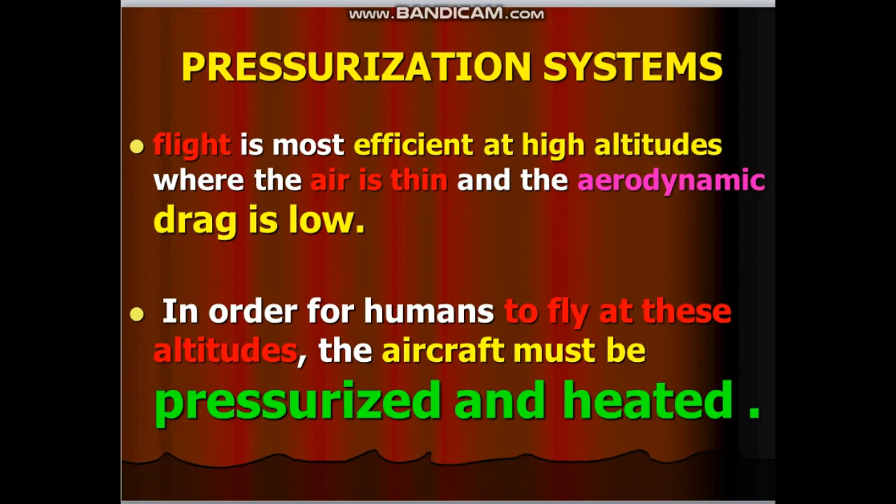Pressurization systems. Turbine engines operate effectively at these high altitudes. Piston engines as well as human occupants of an aircraft require a supply of additional oxygen. Piston engines were limited to relatively low altitudes and did not require a high cabin pressure, so no great structural problems showed up with pressurized piston engine airplanes.

Metal fatigue caused by the repeated pressurization and depressurization cycles caused several disastrous accidents. Today, aircraft structural design has advanced to the point that pressurized aircraft are able to safely and comfortably carry large loads of passengers at efficiently high altitudes for long distance flights.

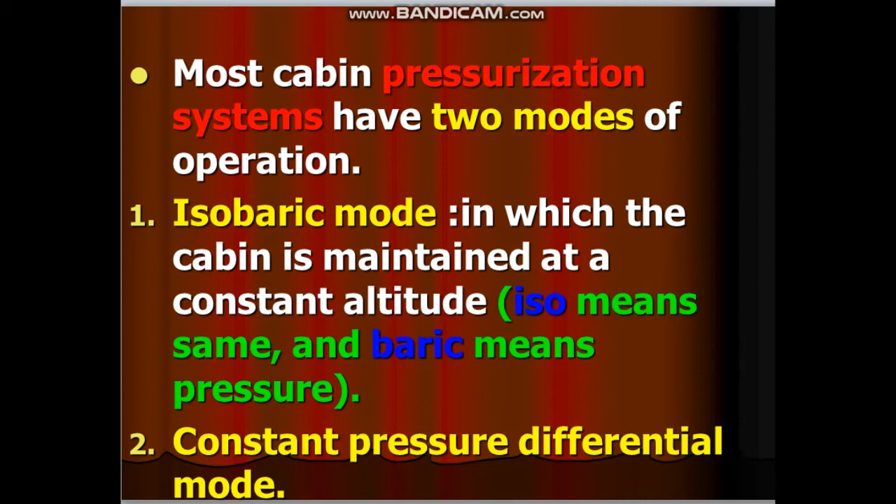In isobaric mode, the pressure regulator controls the outflow valve as the aircraft goes up in altitude to maintain the same pressure in the cabin. When the pressure differential between the inside of the cabin and the outside reaches the maximum structural pressure limitation, the pressure controller shifts to the constant differential mode and maintains a constant pressure differential. As flight altitude increases, so does the cabin altitude, always maintaining the same differential pressure between the inside and the outside.

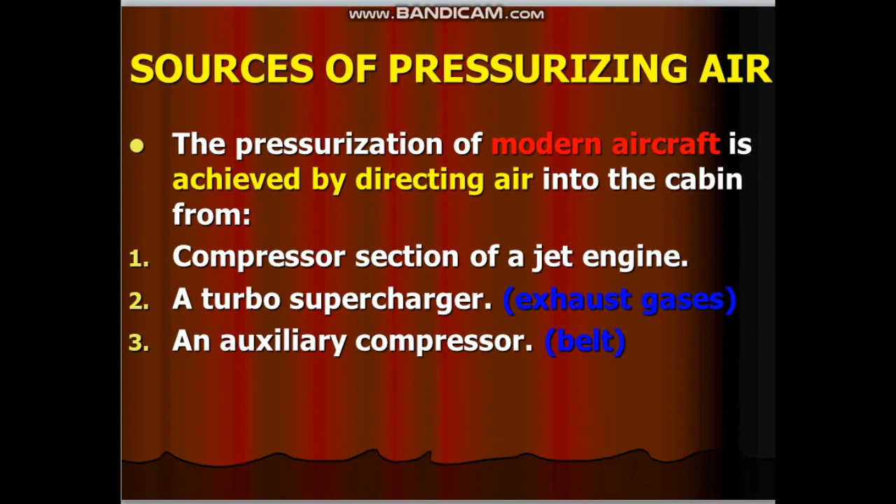Sources of pressurizing air. The pressurization of modern aircraft is achieved by directing air into the cabin from the compressor section of a jet engine and cold bypass. A second one is a turbo supercharger, and it comes from the exhaust gases. The third one, an auxiliary compressor. Reciprocating engine aircraft. Pressurization air for smaller piston engine aircraft is provided by bleed air from the engine turbocharger.

Turbine engine aircraft. The compressor bleed air in a turbine engine is a good source of air to pressurize the cabin, and since the air is quite hot, it's used to provide heat as well as pressurization. Compressor bleed air may be used directly or it may be used to drive a turbo compressor. Outside air is taken in and compressed, and then before it enters the cabin, it's mixed with the engine compressor bleed air that has been used to drive the turbo compressor.

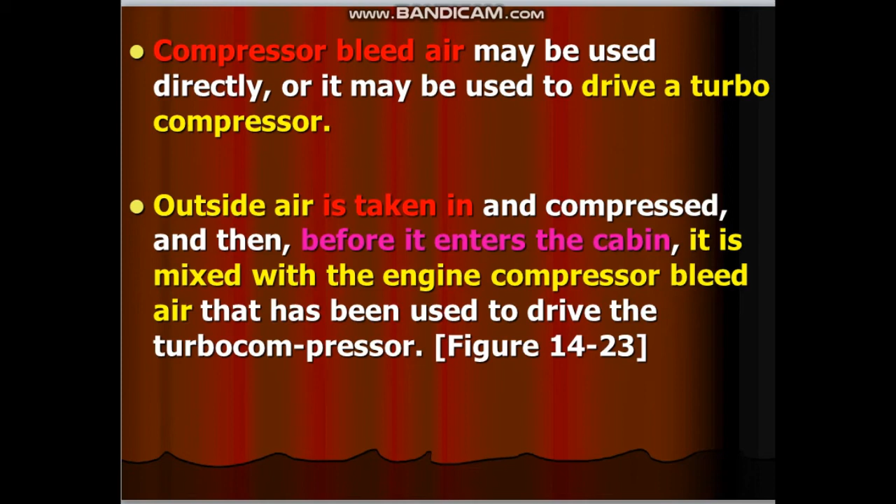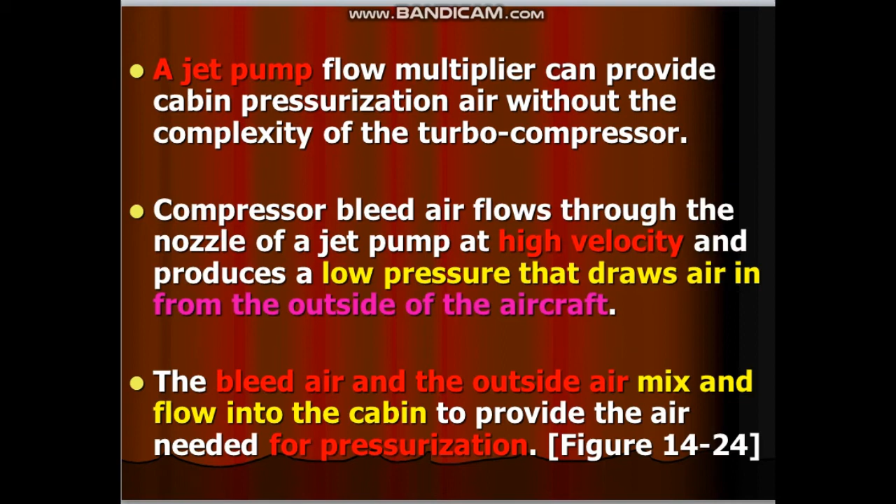A jet pump flow multiplier can provide cabin pressurization air without the complexity of a turbo compressor. Compressor bleed air flows through the nozzle of a jet pump at high velocity and produces a low pressure that draws air in from the outside of the aircraft. The bleed air and the outside air mix and flow into the cabin to provide the air needed for pressurization.

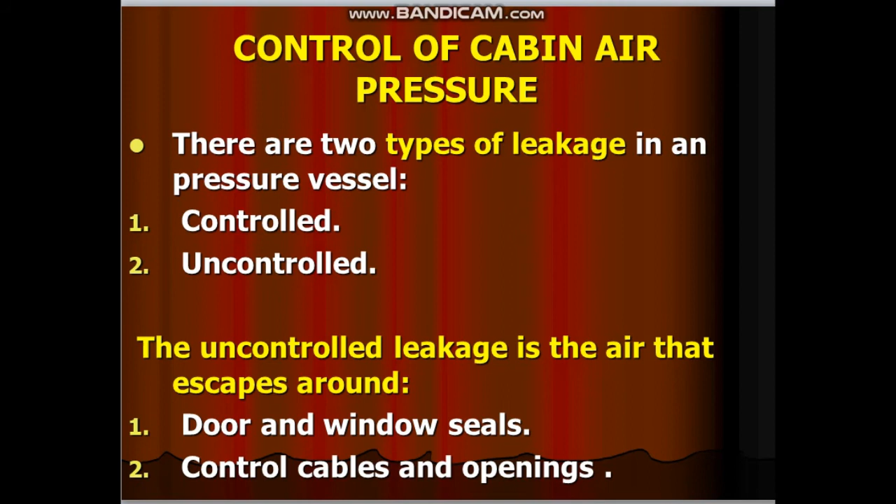Control of cabin air pressure. There are two types of leakage in a pressure vessel: controlled and uncontrolled. The uncontrolled leakage is the air that escapes around door and window seals, control cables, and openings. Pressurization control systems can be pneumatic or electronic.

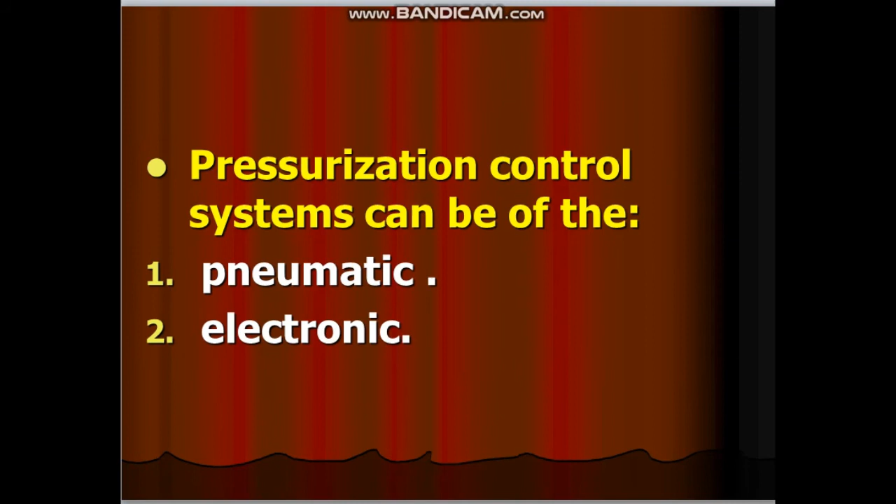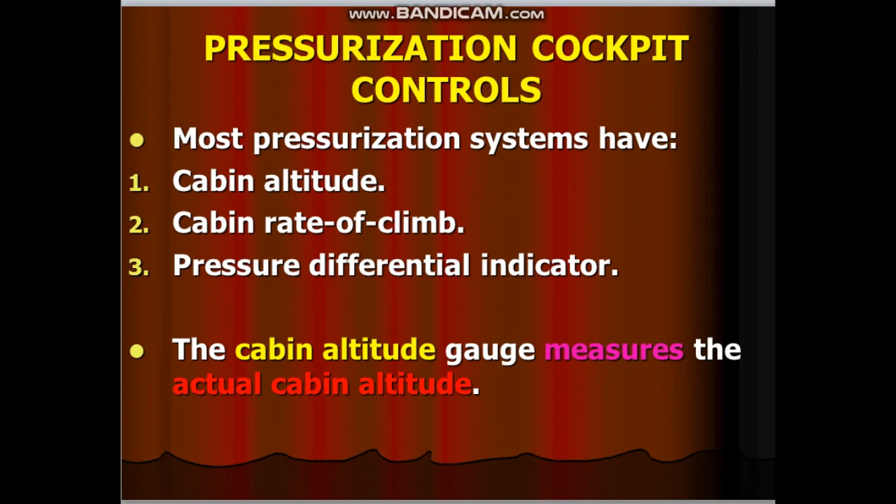Pressurization cockpit controls. Most pressurization systems have cabin altitude, cabin rate of climb, and pressure differential indicators. The cabin altitude gauge measures the actual cabin altitude. The cabin altitude is almost always much below that of the aircraft altitude, except when the aircraft is on the ground. An example would be an aircraft cruising at 40,000 feet would normally have a cabin altitude of about 8,000 feet.

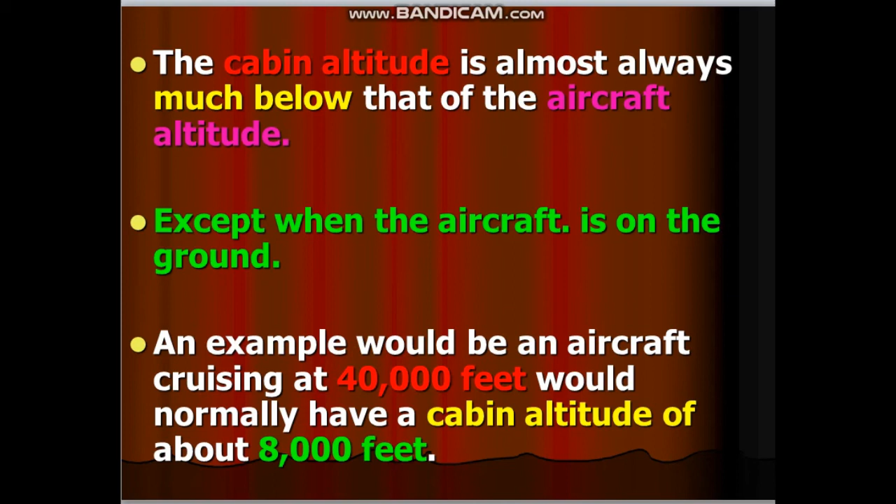The cabin rate of climb indicator allows the pilot or flight engineer to adjust the rate the cabin altitude is climbing to levels that are comfortable. The normal climb rate is 500 feet per minute. The normal descending rate is 300 feet. The cabin rate of climb can be automatic or manual according to the type of aircraft.